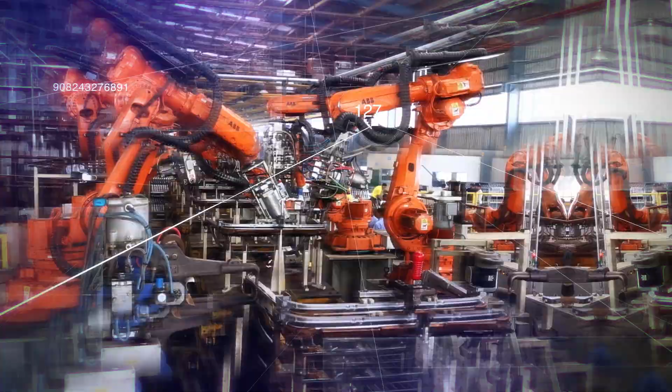Devotion to quality, a passion for perfection, with absolute precision.

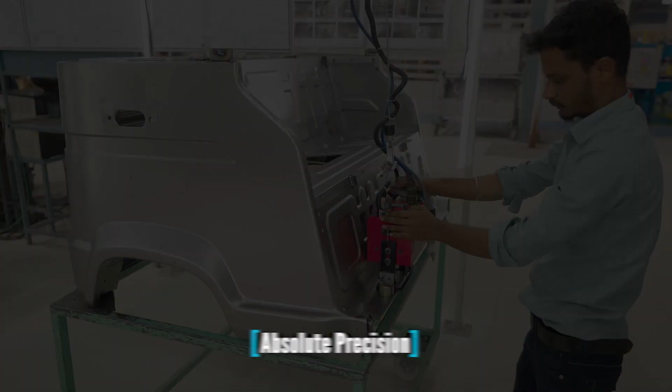Nahar's Laxmi Group, a modern legacy of success through precision to progress.

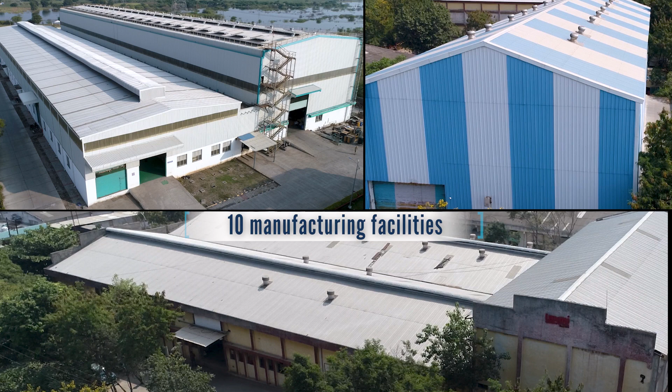In 1979, a visionary entrepreneur, Subhash Nahar, established Laxmi Metal Pressing Works in Aurangabad. Across 4 decades, Nahar's Laxmi Group has grown into a dominant player in the automobile component sector, with 10 manufacturing facilities spread across 3 states.

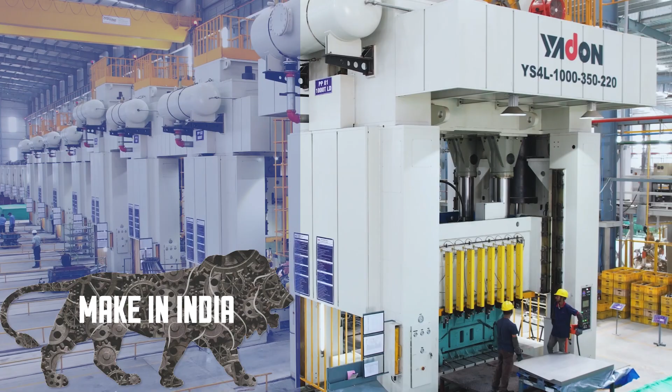A growing symbol of Make in India, producing a wide range of precision-engineered automotive components with cutting-edge technologies on par with the best in the world.

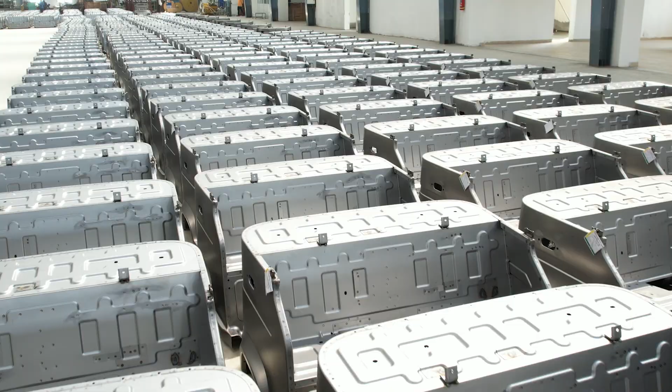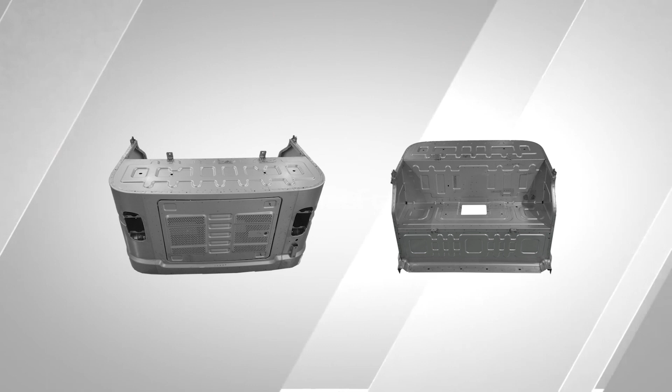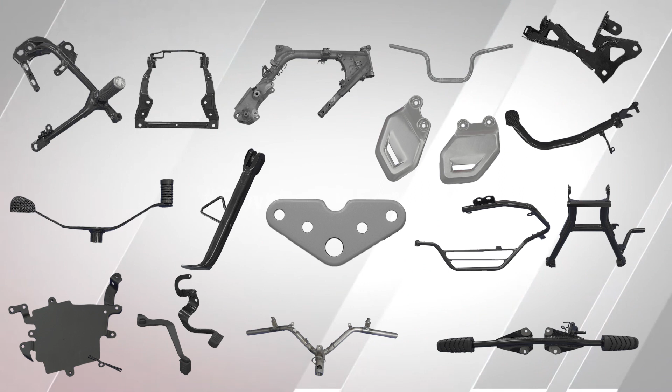Today, Laxmi Group has a large product portfolio ranging from 2-wheeler frames, chassis and mufflers to complete 3-wheeler chassis, cabins, doors, load decks, windshield assembly and laminated safety glasses. Tubular products like swing arm, main stands, RP step, engine mounting cradle and an increasing range of precision components to meet the changing needs of several leading automotive manufacturers and engineering companies in India and overseas.

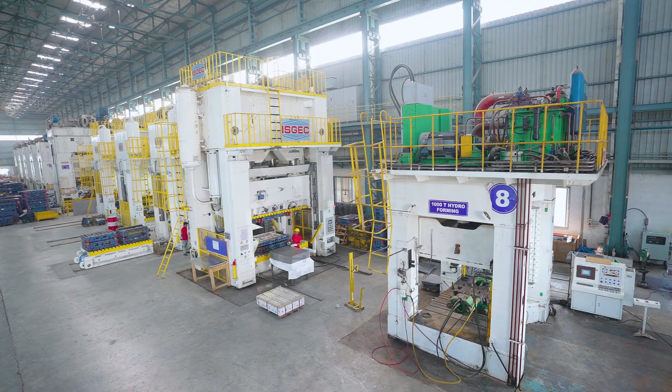Establishing ultra-modern facilities with large investments in advanced machines and systems. More than 100 presses with capacities ranging from 80 tons to 1000 tons for achieving precise tolerances with high productivity.

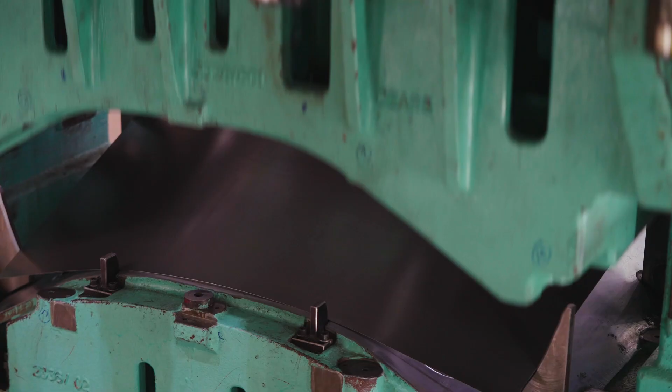More than 200 robots are at work across multiple production lines for precision manufacturing of components. Multiple robots operate the assembly lines for the 3-wheeler body, door frames as well as chassis manufacturing.

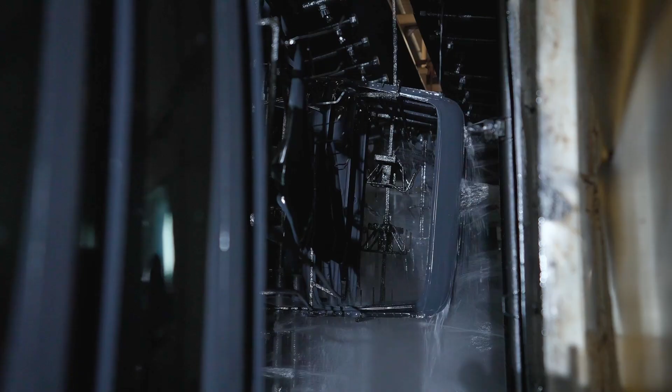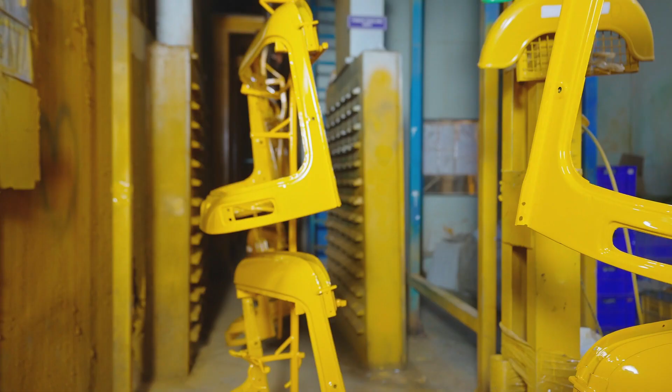The PTCED coating lines with multiple 7-tank process gives a long-lasting surface finish to the components. The powder coating plants have fully enclosed painting booths. Robotic nozzles ensure consistent coating of colors. The windshields are assembled with glass and fittings as a ready-to-fit automotive component.

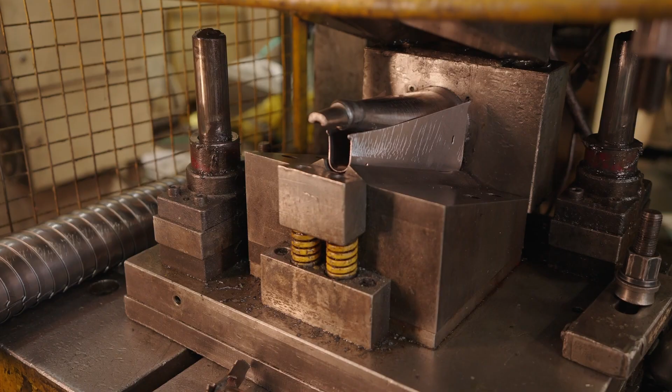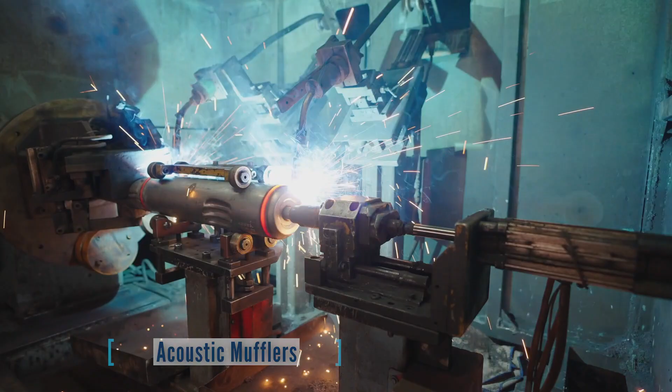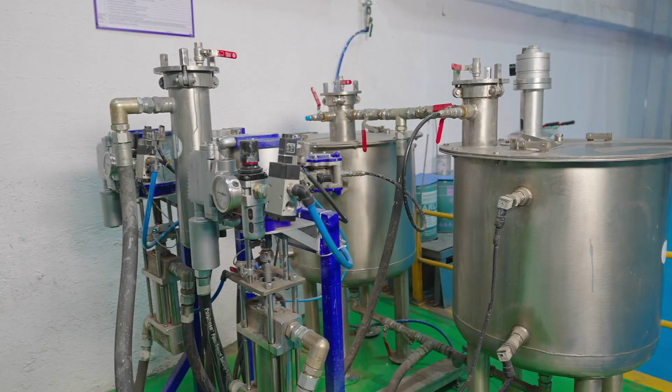Manufacturing a wide range of 2-wheeler frames for motorcycles and scooters, including electric vehicles and acoustic mufflers ranging from 110cc to 250cc. CNC tube bending machines help produce components with high precision and tolerances. Special systems are installed for internal painting and furnace curing.

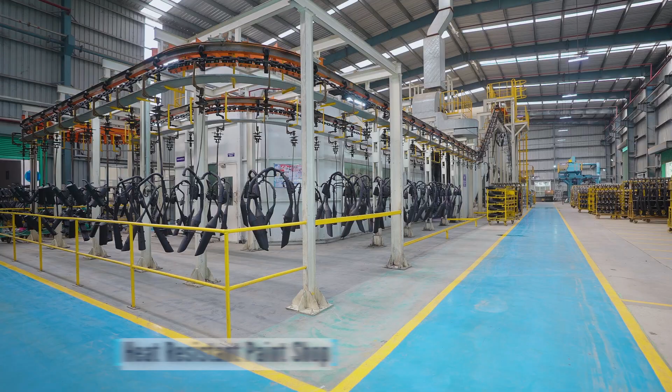In the heat-resistant paint shops, the mufflers undergo multiple rounds of paint coating followed by furnace curing.

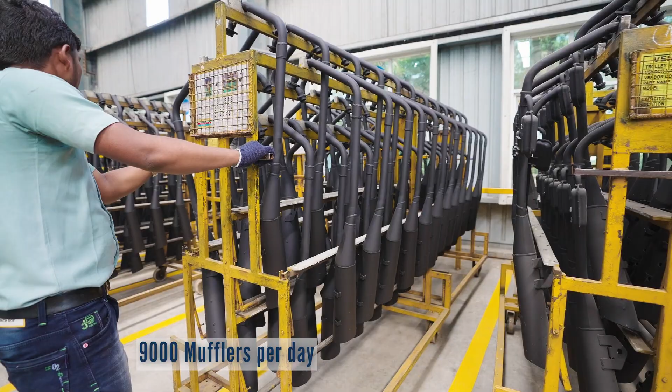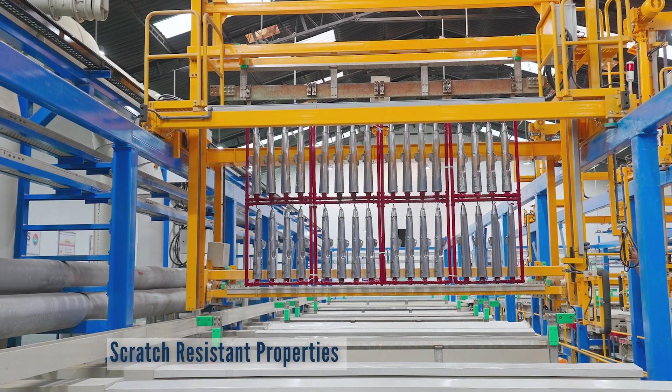An ultra-modern tri-nickel chrome plating plant provides multiple-stage advanced surface treatment to components with scratch-resistant properties, aesthetic appeal and durability. The plant has fully automated operations with SCADA control.

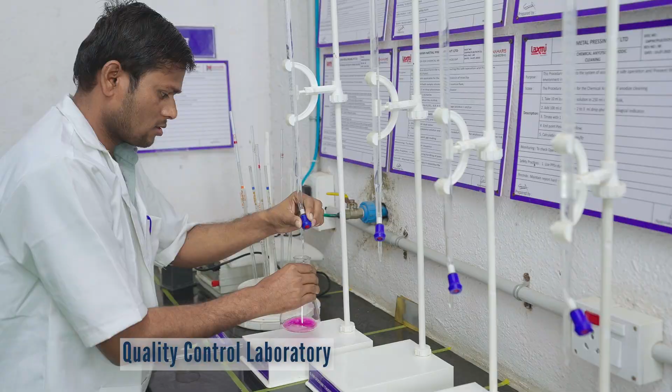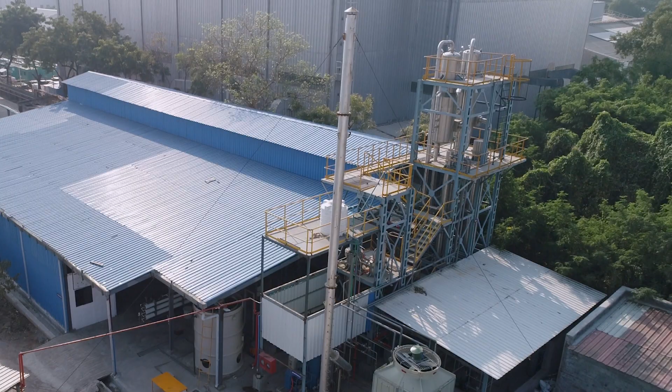At the Quality Control Laboratory, components of every batch of production undergo rigorous quality tests. Pollution control systems include advanced fume scrubber extraction systems and effluent treatment plants to ensure zero discharge of any pollutants.

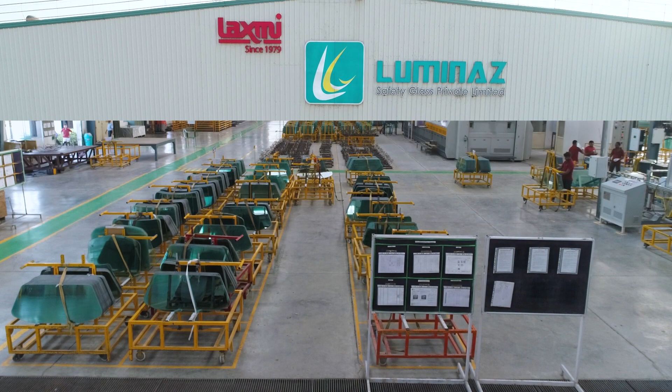Defining growth through forward integration, Laxmi Group established a modern greenfield plant for the production of automotive safety glasses. This state-of-the-art plant incorporates the latest cutting-edge technology machines and systems for high-precision shaping, heat treatment, lamination and testing of glasses.

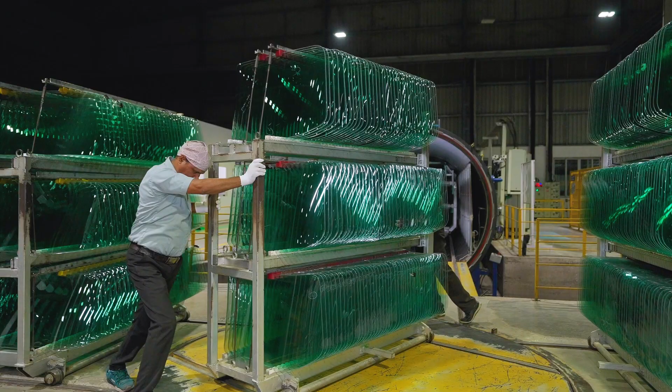Every batch of glass produced are tested at the Quality Control Laboratory for various parameters. A darkroom lab minutely detects any defects on the laminated glass at the micron level.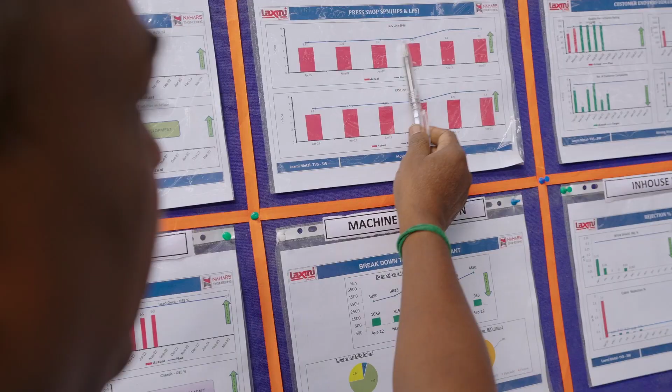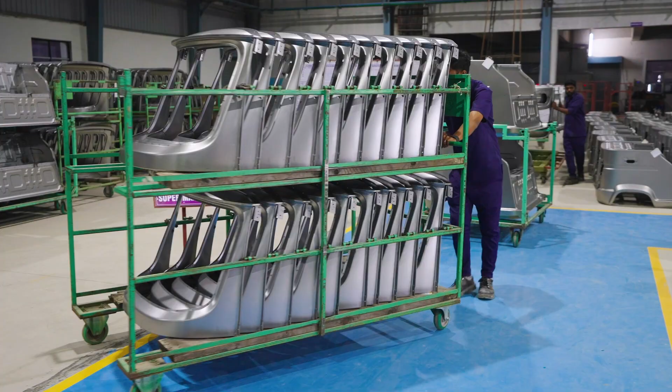Adopting the best global practices in manufacturing, such as the TPM practice. Teams at all locations review the tools and techniques daily to ensure optimum productivity with total quality, leading to uninterrupted, just-in-time deliveries to customers. Leveraging our vast experience and technological strength, we are expanding our products portfolio by constantly anticipating the changing needs of customers.

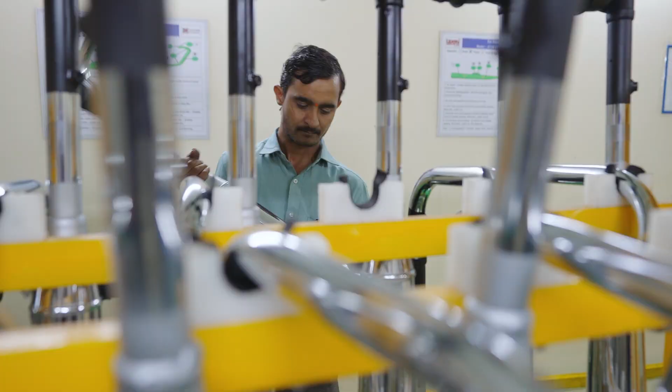Laxmi Group is driven by teams of talented experts with commitment and passion, guided by core values of dedication and integrity. Employing more than 5,000 people, both directly and indirectly, the group is strongly committed to employee welfare, community livelihood, healthcare, and building social infrastructure.

Led by a visionary leadership, Nahar's Laxmi Group is scaling new peaks of success for industry and society for a progressive tomorrow. Laxmi Group, precision to progress.